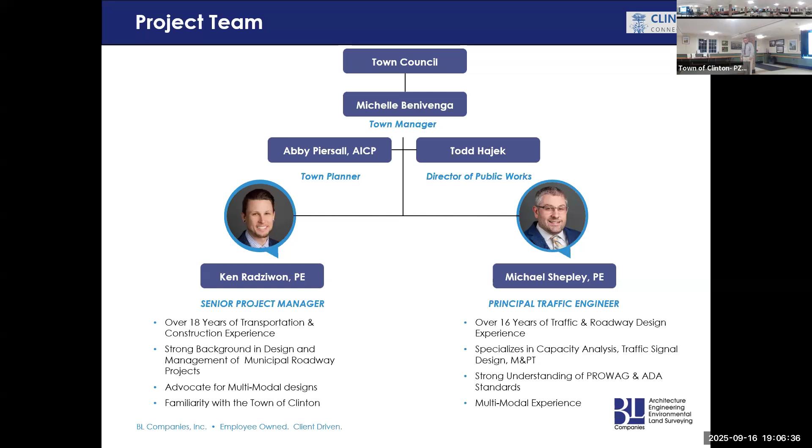So anyways, we're just trying to highlight some of the experience that we have and how we kind of format ourselves into this project. So we're just gonna start with the project location map. North is up.

So just keep that in mind as we go through the corridor here, outlined in red. We try to use the locations of some of the existing streets out here. So on the west-hand side, we're starting at North High Street, and we're taking it all the way over to John Street and Pearl Street, kind of where Chips is, the new CVS, etc.

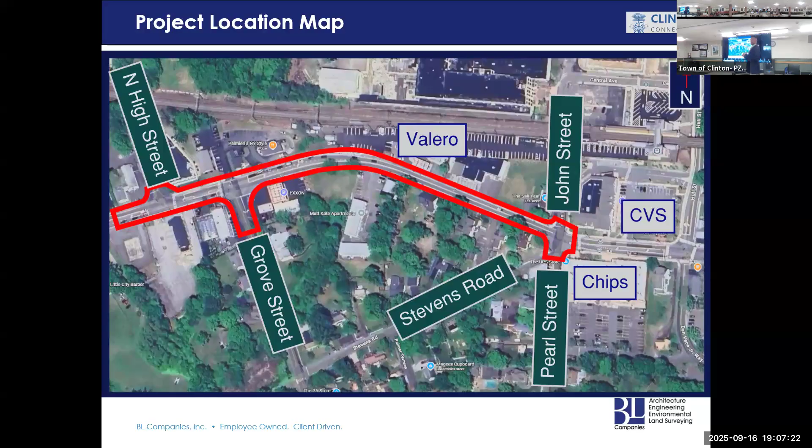So through this corridor, we're gonna get a little bit more into the weeds in the next slideshow. Sidewalks on both the north and southern side of the road, all the way through here. So we're trying to make the connection of the existing sidewalk that you already have and what I would consider a relatively new area just on the west side of North High Street over to CVS and get you downtown. So we're trying to get that connectivity, maybe enhance it a little bit further as you get towards Job Lot, etc.

So with that, we just want to define some of the criteria of the project, some existing conditions, maybe a purpose and need, like why we're here. And obviously many of you know, we've already alluded to it, it's putting some sidewalks on the street. So there's a lot of areas of non-compliant sidewalks. So in our world, we have a lot of guidelines that we follow. And it's important to understand it's guidance. There's standards and there's guidance. So here we're using a lot of guidance.

So we're going to throw a lot of acronyms around, and if you don't understand, please ask. So we're gonna be doing ADA guidance, which is the Americans with Disabilities Act. I'm sure everyone's familiar with that. That's kind of our first and foremost. So we want to get these sidewalks to that most recent guidance and what we call PROWAG standards, which is Public Rights-of-Way Accessibility Guidelines.

So basically taking ADA guidance, which is generally for buildings, structures, things like this, but actually thinking about how do we put that into a roadway? Because it's not really a one-for-one. So you might have a guidance that says you need a 36-inch width doorway. They don't have doors on the streets, right? So they created a set of guidance that puts you on the road. So that's what we're adhering to out here.

That's where Mike comes in with the traffic signal. It's about 8-ish years old now at North High Street and Grove Street, but we want to upgrade it. And it's also going to account for the pedestrians and the push buttons that Mike's going to get into so folks can safely travel across. So there'll be some new crosswalks that we'll put in along with the project. We'll get into that in a few minutes.

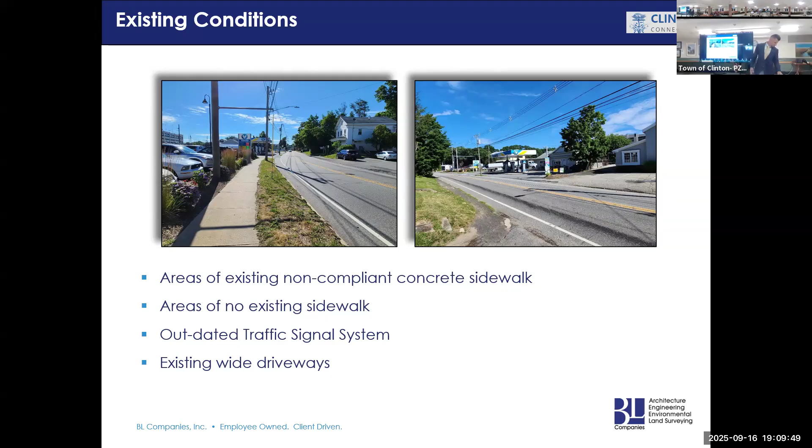So the total purpose and need, which ties into what I said. Some overall larger zoomed-out ideas: we want to improve our pedestrian safety. First and foremost, we want to make sure that when we put this in, we're thinking about safety. What do those conflict points look like? We want to make sure that vehicles accessing in and out of their driveways and businesses, which there are many out here, are going to be safe. So we're always thinking about that.

What can we do? If we add curbs in here, if we raise a sidewalk, we push it back, we make room for snow. How do we interact with some of these features, right?

So as we talk about, many of these are kind of tied together with installing compliant sidewalks, which I've already spoken about. There's some non-compliant sidewalks. So you're going to see some of the project will work out some what look like perfectly good sidewalks, which we'll talk about. There's a reason for that. It's not just to spend money. There's an actual reason: we're trying to meet the guidance that's set forth by the federal government for us.

There's some drainage conditions that we want to talk about. I'm sure if anybody's driven through here in any kind of rain event, you notice that there's some ponding. So we're going to talk about what we can do to potentially improve that. And then, as I already alluded to, access management, which is just kind of consolidating the driveways. Everybody good so far? All right.

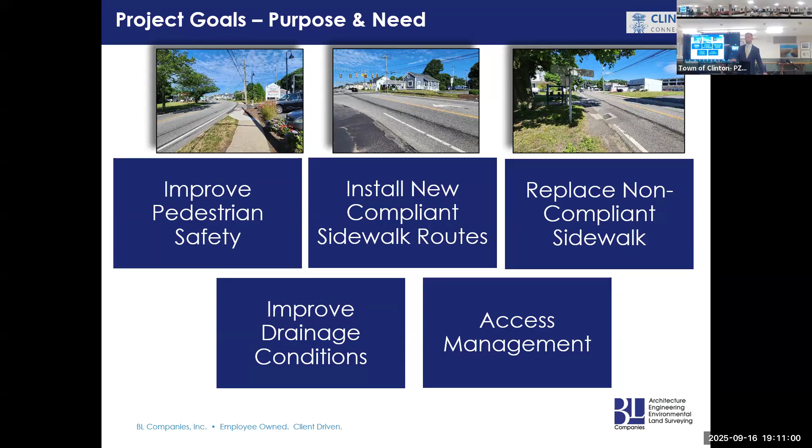So we have a colored rendering of our plans. Again, we have a plan set in the back over here showing the same thing, just with not as much color. Color really helps. And then we can also pull up what these look like, and we can zoom in and zoom out later on. But just for now, we want to walk through the corridor. So I'll come on this side over here.

And then Mike's gonna talk about what that looks like as far as traffic is concerned, and what appurtenances are required so that folks can push the button, turn the signal red so that you can safely cross. So there'll be some new crossings as part of it. And then the sidewalk will continue all the way through on the northern side.

There's a few different challenges along the way on this particular side because the grade varies. If you walk there now, you'll see some 6x6 timber that's stacked up, probably about 18 inches tall, acting as a retaining wall. So we're gonna look to replace it. It's right over here. I know, Todd, you're probably zoomed out a little bit. So we're gonna replace that with concrete. That wall's gonna go away, and we're gonna add a new concrete wall. It's gonna be a little bit more robust rather than timber, which is starting to lean a little bit. It'll just be better. That'll be integral to the sidewalk, so that'll look nice.

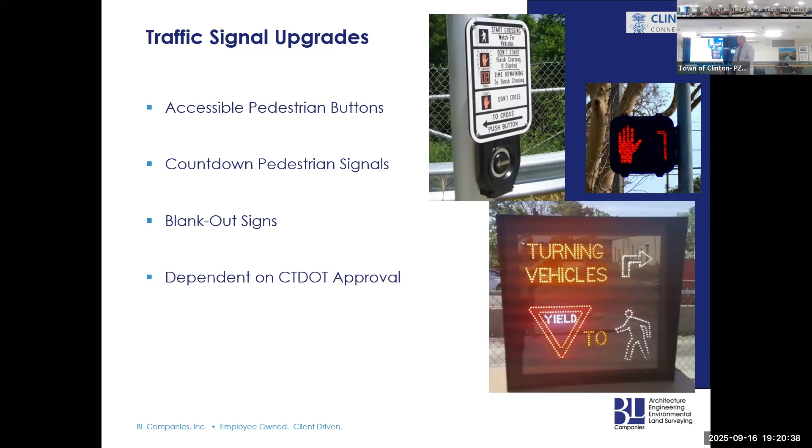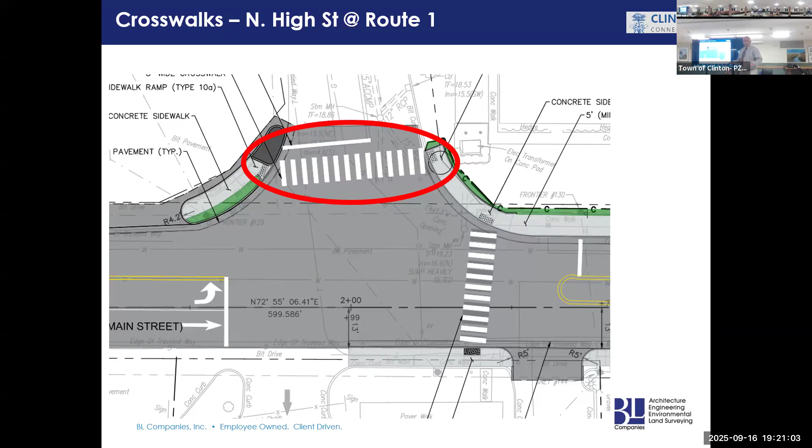Two more additional crossings are the garden centers on this side, and then crossing the street to, is that the gas station on this side, I believe? And then the buttons, I believe, are here and here. I think we're also moving the buttons here on this ramp as well. Of course, there'll be buttons on this crossing as well. So basically, what we're just trying to do is make sure that there's directional crossings so that the pedestrians have an easier time crossing the street and that they're spending less time on the street as well.

I'll hand it back over to Ken to talk about the extra work here. So as Mike alluded to, whenever we put crossings in, we try to make it as short as possible, because the shorter it is, ideally, the less time it takes you to cross, the more safe it is.

So where we can, when we're doing these types of projects, we try to put the crossings, even though a crossing like this, you say to yourself, well, I'm just gonna cross in this path here. I'm not actually gonna wrap myself around and cross. The idea behind it is that this is a shorter distance than out here. And when you have a signal involved, we have to take that into account. If you add another 20 feet, you have to add another couple seconds.

And then you don't think about that all the time until you're the guy that's sitting in there in your car going, what is taking forever, right? So you get a little anxious for it. So that's kind of the purpose of it. And again, for this particular crossing, we've highlighted in red, this is an area where in the initial scope, we didn't actually have a crossing.

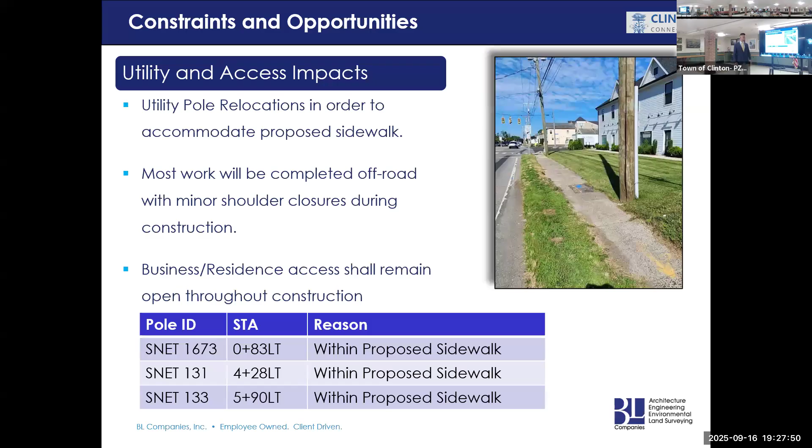And then I do want to point out that even though there will be some utility work, the businesses and residents along the corridor won't be affected as far as their points of egress from their homes or their businesses. None of them should affect any of that.

You don't have to listen to me much longer, I promise.

We're almost there. So more constraints and opportunities, we have to talk about rights of way impacts. So this is our schedule of property impacts. So when we have these, we have to identify where we are potentially impacting residents, private property. So outside of that state right of way, we want to know what are we doing and how much area are we affecting? What's that land look like? So this is that schedule.

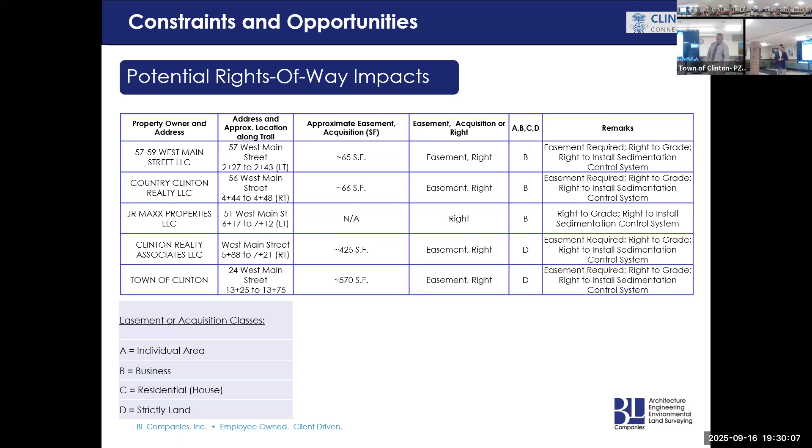So again, my name is Kathleen Erickson. I'm a project coordinator with the DOT's Division of Rights of Way. Our office is responsible for acquiring property rights that are needed for transportation projects all throughout the state. So I'll just be giving you a brief overview of what the acquisition process looks like. Before I get further into that, though, I do want to mention that the property impacts for this project are still being finalized, so they could change as the design is progressing.

Next, our office will determine the fair market value of those property rights, which will be used to create an offer of just compensation. The property owner will receive the offer in writing, and a right-of-way agent will be available to meet with them to discuss the project, their specific property impacts, and the offer itself. The property owner will be given a reasonable amount of time to consider the state's offer and to enter into negotiations. And then once an agreement has been reached, the department will prepare all necessary documents in order to record the deed and the property map on the town land records.

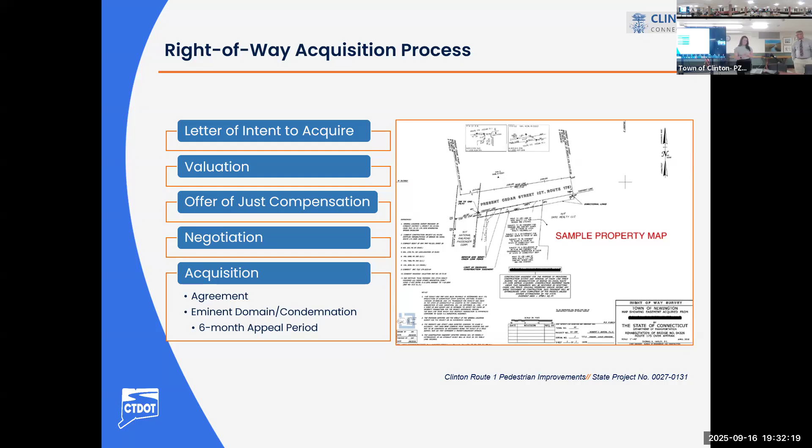And just one thing on the property acquisition piece, where it may be necessary. The town council has deferred that conversation to the state, so individual staff members won't be able to have conversations about those negotiations. That'll all defer to the state, so just be prepared for that part of it as well.

All right, so last on the constraints and opportunities piece of this project is the environmental and historical impacts. That is part of any project we always look at, with the help of the state, I point at Mark here. We start with the project needs determination form, and because it's engineering, we have to give everything in acronyms. We call it PNDF. This makes it sound a lot smarter, I suppose. So we do an environmental screening.

So if that becomes part of the project, you're getting close to the ocean, there's ultimately going to be some floodplain impacts, and that will have to be looked at a little bit closer, which I said we have to work with Army Corps on, potentially DEEP, to see exactly what we need to do.

And because there's a potential presence of the northern long-eared bat, there'll be some mitigation factors that will have to accommodate for them as part of our design as well. There's time of year restrictions because of that, like when the contractor can clear or cut down trees if it's part of the project, which I don't believe we have any of that here anyways. But that's what would occur here.

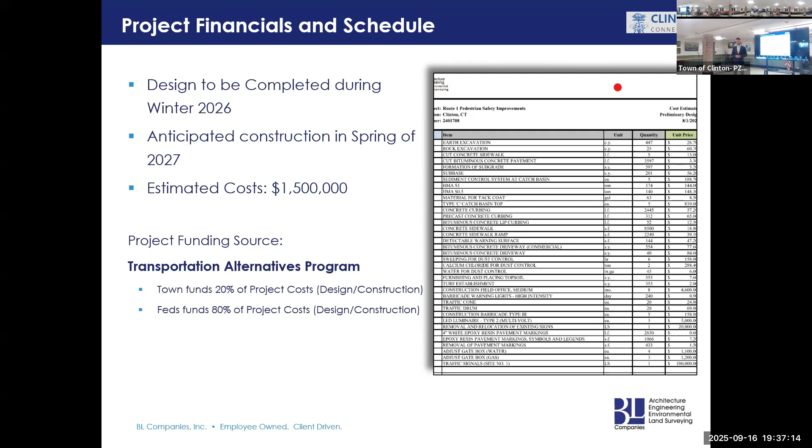I wish my parents would do something like that for me. I digress.

So with that, thank you for listening, and we're going to take some questions. If you go to one more slide, I just want to put up, as Abby already alluded to, some of her information.

I will point out that if you have any comments beyond this meeting, you can email Abby or call her by September 30th. That way we can keep our project schedule and move into the next phase of design. It doesn't mean you can't call the town at another point, but that's when we're really going to start putting the rubber to the road, October 1, and move into the next phase of the project.

So with that, enough of me talking, I want to see if anybody has any questions. Not all at once, though. If nobody else has questions.

Yes. I'm on the town council, so I'm anticipating getting these questions. The concrete wall you talked about is going to replace the wooden retaining wall. Someone will say that we are a quaint shoreline town and the wooden aesthetic is what they really appreciate about downtown. Is the concrete wall going to look as nice as the wooden wall that's currently there? So are you asking if I think it's going to look as nice? I'm asking what it's going to look like. Is it just going to be a concrete slab in the ground, or is there going to be some design aesthetic?

There won't really be any design aesthetic because it's going to be about yay tall, about here. It's going to look exactly like a concrete curb, 6 inches wide, 18 inches tall. I don't know if you have concrete curbs in town, Tyler. We have some. The biggest reason we're replacing it, though, is because the wood's rotting. Yeah, so it's very minimal.

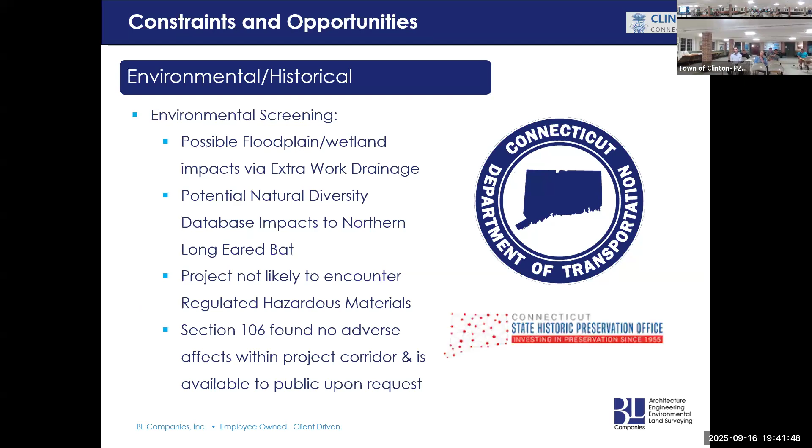So, last one, the crosswalk at Chips, the one that is set back a little bit. Yeah. I heard you say about the shortest point from A to B, and that's why it's set back a little bit. Visually, if you are driving east on Route 1, will you be able to see that crosswalk before someone is barreling 40 miles an hour and swings to the right and hits somebody in the crosswalk?

Yeah, so right now there's a home that just got removed, I believe. There's a sign up. The White House, it's gonna eventually go, so that restricts some sight lines, and there's an existing tree there if I recall. That sounds like an enforcement question to me. Why is somebody barreling through at 40 miles an hour and taking the turn? So I would direct you to your law enforcement. I can't particularly answer that.

But I understand what you're saying is you would want to bring it a little bit closer. The idea here too is that we can make a connection heading further south, so there's Stevens, and then continue south on Pearl to connect going down to, say, the Town Beach area. So that's kind of where that's coming from. Second.

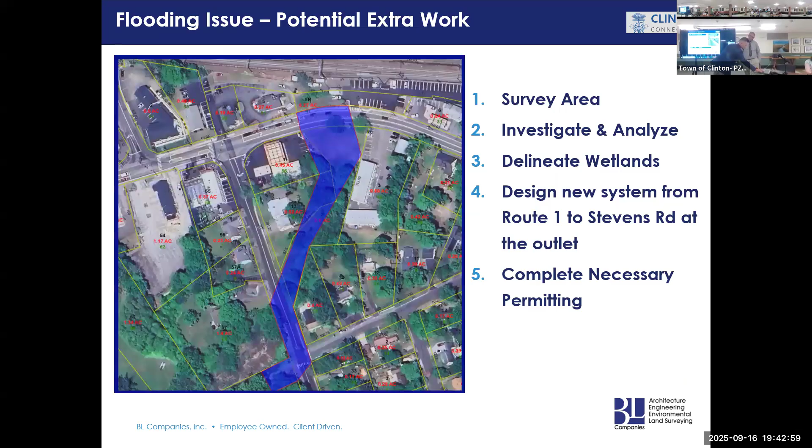It might be hard to see, but because of the geometry of the road as well, if we were to pull this out, there's really no good spot on the eastern side to have a directional handicap ramp, sidewalk ramp. In other words, we also have to consider not just folks in wheelchairs, but folks that are blind. So you'll see what we call the tactile warning strips on all of our sidewalk ramps, the little bubbles on the top there. Those generally point you in the direction of where you're crossing.

So if you notice a lot of our ramps, they're directing you to the crossing. They're not directing you into the middle of the road. That's something we're trying to get away from the best that we can. So if we were to put this ramp over here, someone would just follow it perpendicular to where they're going and it would put them in the road. So ideally, we're not gonna do that.

This is just a representation of what would be. This is not the final design because it wasn't part of the work. We're just trying to show something of what it would be. So to your answer, that's potentially why I wouldn't put it there. I would want to work this geometry to make it a tighter radius so that I have more room, but that's not really the purpose of the project. Thank you. Sure.

Any questions? Individual properties or any of that kind of stuff too? Is there anybody? Your hand up. I was going to ask whether the letters had been sent. Yes, two rounds of letters were sent, so folks should have received a certified return receipt letter with a signature, and then another regular letter after that, in addition to the legal notices, plus some advertisements on the town website and Facebook, so we've been trying to get the word out to folks as best we can.

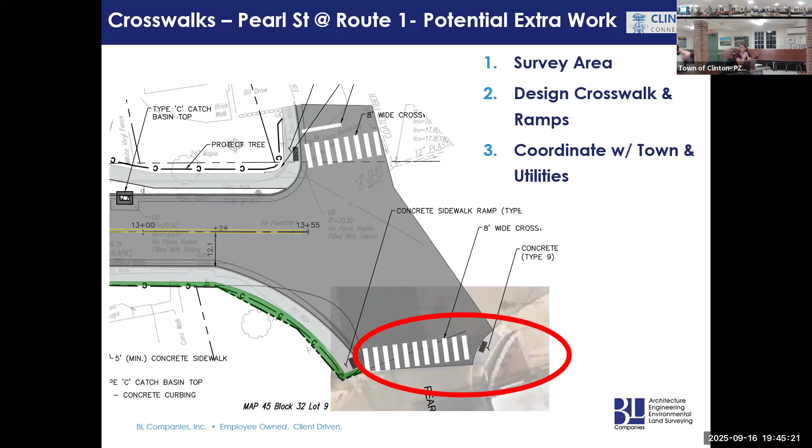Do we need to talk about the Exxon Mobil, where you're gonna cut off their driveway? Okay. Sure. Do you have any questions that you want to ask right now? Yeah, I mean, you bring it in, you're gonna interrupt business. So the gas station has 2 entrances on Main Street, West Main Street. That's where the gas is. So right here on Grove, and West Main. So you have your 3 entrances, yep.

I have 2 on Main Street. This is Grove Street with a separate entrance. I'm talking about Main Street. That's where my customers come from, mainly. Customers from the north side get their gas from the left side of the car, and customers who come from the south side get gas from the right side. Plus I have customers for the deli and the parking lot. And the gas load, they get the gas load every other day. So a huge truck comes to the station; they have to come in from this side and exit from the other side.

So from the gas station, they enter, you're saying they come from the east and go west, or they come from west? You talking about the customers? Well, the customers come from everywhere. From everywhere, yes. Right. So are you going to close one of the entrances of the gas station? Right now, that's what we're showing here, because you have your Grove Street entrance, so that could help with the flow of traffic, and then you still have one here.

We hardly have any traffic coming in from Grove Street. Usually the light is on and there's cars there. That would make sense because you have three entrances, so I would imagine that you're gonna use two. Two, right, from the main street. So if you close one, then it's gonna have people come to Grove. But 90% of my customers come from Main Street, not from Grove Street. I understand that. When they come from 95, from the north side, the customers just come from this side.